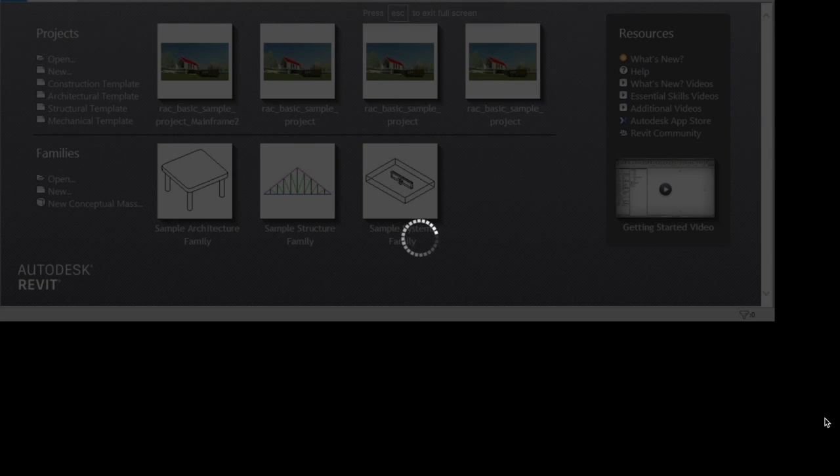So I'm going to show you a lab we set up, which is running Revit, but it's linked to a lab we set up with our own Panzura controllers. So this is 2 virtual private clouds, 2 separate clouds. We just build a tunnel between them to connect.

When I go to open here in Revit, you'll see that this Y drive is mapped to a server, this IMD West filer. Because we built this tunnel, I can just call my server by its server name, map a drive to it, just like it was a server on my local area network. So I can come onto this server, go into some folder structure, find a file, grab this central model. I'm going to open this up, it's going to overwrite my existing, and the performance up here is very much just LAN network performance. It's as good as your local area network.

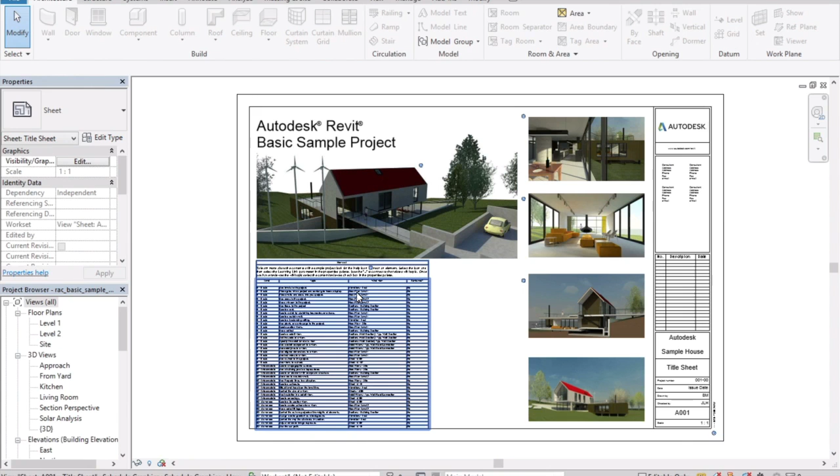And so the model opens up. You can come in here, you can see the performance is really good. This is kind of a base level machine spec for Frame, you can do even better than this. This is also a very simple model, but you can come in and see the performance is just fine. I can borrow elements, drag them, everything I would normally do.

What's important to keep in mind here is I could be one person working in the cloud off of Frame, and I could have a whole other set of people working in an office on a local Panzura, working in the same model at the same time. We're all collaborating together. So this is why Panzura is a hybrid system.

It allows you to do on-site prem storage, plus it backs everything up to the cloud, and all we're doing is accessing that same cloud data through the cloud, running a machine instance in the cloud. So I can do all of this.

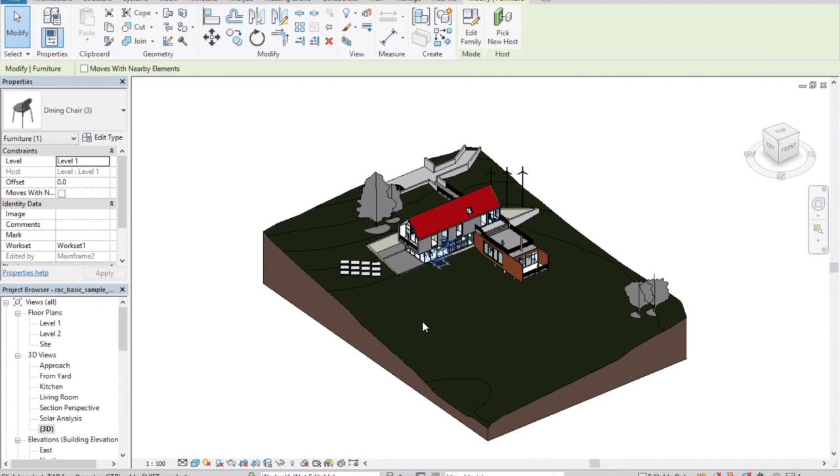You can see if I come into a 3D model, I can come in and rotate this, orbit this model, and my performance is really good working on even a simple model. And then I can come in here, if I hop back over here, I can start a sync with Central, run it.

In a couple seconds my sync with Central is going to be done. You're going to see the scroll bar jump and I'm done. So I've just synced my model back to my Panzura environment. My storage is all in Panzura, but I can have consultants working on Frame.

I can have my own employees who might not be able to make it into the office. I don't have to set up all my VDI instances, and on top of that, they could be located anywhere around the US, and I don't have to set up VDIs for all of them to work from. This will work anywhere.

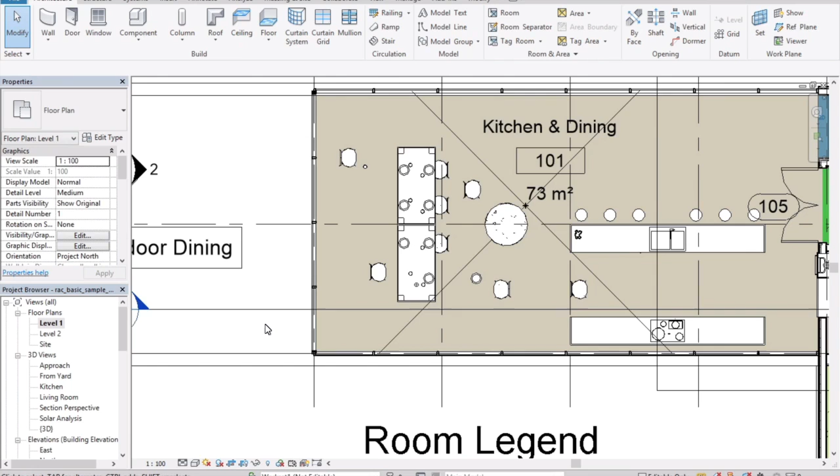I think that obviously clearly demonstrates the power of being able to work through a browser on any device. The way that we set this up and the way that we deliver this level of performance, what's different with Frame. Whoops, let me not share this. I'd like to present this.

What we do is we connect every user with their own isolated virtual machine. We're not doing terminal services, we're not using RDP. We've rewritten our own protocol to be able to deliver this rich interactive experience from basically a dedicated workstation running in the cloud.

We start with non-persistent pooled virtual machines, meaning when a user logs out, the system is wiped, so there's no residual information stored on that system. So users have to learn to save, obviously, to cloud storage like the Panzura.

What we also can do, though, is we turn on user profiles in the environment. So if a user has their menu options set, we can save those user profiles off at the end of the session and then re-inject them back into the VM before the user logs in.

The way that a basic account gets set up on Frame is we start with a sandbox. The sandbox is your gold master image. You install the applications. When you're done, you hit publish, and we stamp out those copies of your production instances for users to connect into.

We can also run other services in the environment, so if you need a license server for some applications, we can run a license server in the environment. Autodesk's EULA does not allow us to run a license server in the cloud, so you have to connect via VPN to an on-prem license server, but anyways, that allows those licenses to float from on-prem to the cloud easily, just through a VPN tunnel. It's like a site-to-site network connection.